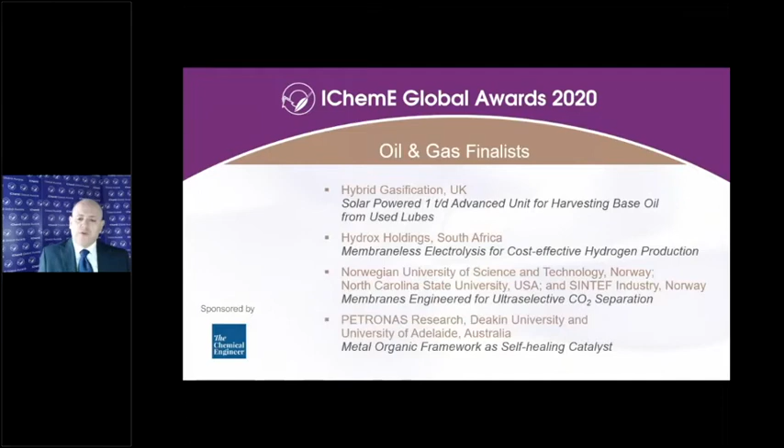Hybrid Gasification, Hydrox Holdings, a joint entry from the Norwegian University of Science and Technology, North Carolina State University and SINTEF Industry. Another joint entry and winner of the IChemE Malaysia Oil and Gas Award, Petronas Research, Deakin University and the University of Adelaide. Saudi Aramco, EXPEC ARC, and 3 more entries, all from Saudi Aramco.

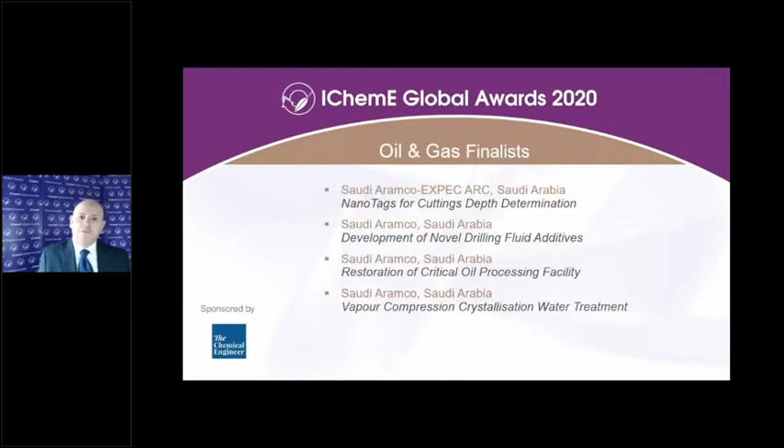Yes, my name is Abdullah Malik and I'm going to present to you my 2020 IChemE Global submission on a solar powered 1 ton per day advanced unit for harvesting base oil from used lubes.

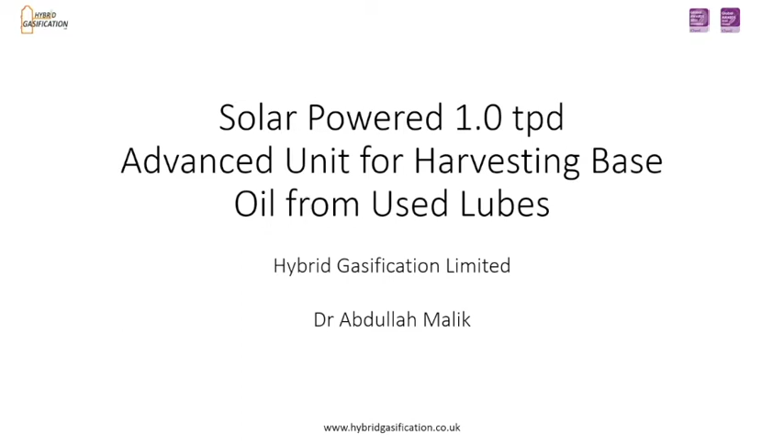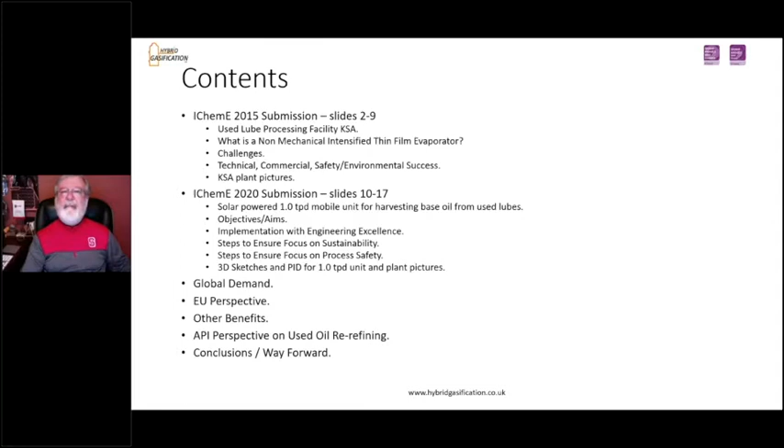My presentation, I'm not too sure how long I can take. Can I be advised on that? How long I can take on the presentation? You have approximately 10 minutes. 10 minutes. Okay, thank you very much.

I wasn't too sure. But my presentation consists of 9 slides, almost 8 slides on my previous submission in 2015, which was shortlisted. I will run through quickly just to put some perspective to where we went to the next stage of this 2020 submission, and I'm happy that it's also been shortlisted for the presentation. And then I will go to some global demand for base oil, lube oil, and EU perspective on that, and in the end some conclusions.

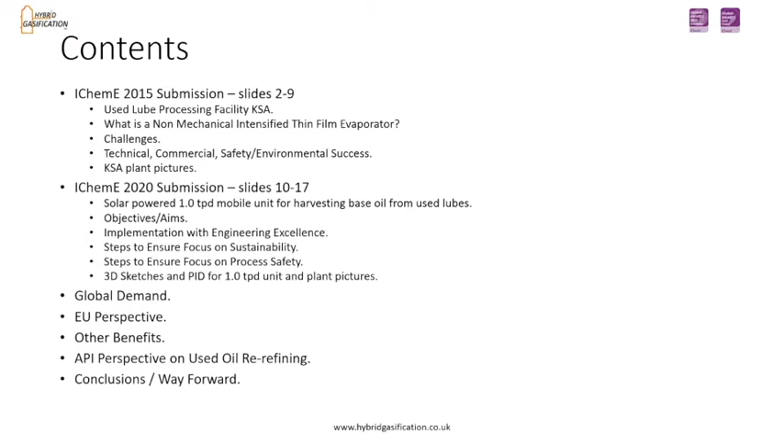The first used lube oil processing facility, 100 ton per day capacity, was built in Saudi Arabia to produce Group 1 heavy base oil. It was a vacuum distillation facility. It used structured packing for separation of consistent quality product. Actually, the interesting and novel part was that rather than using a conventional wiped thin film evaporator to treat the residue, a non-mechanical thin film device was fitted in the flash column, for which a patent has been filed.

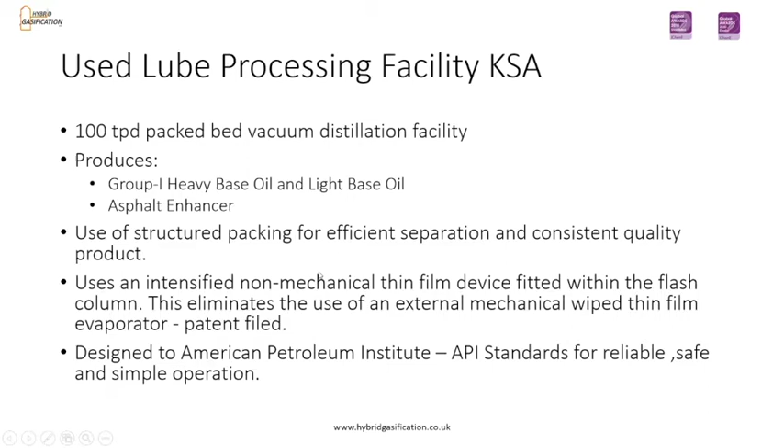I'll explain a little bit on what a non-mechanical intensified thin film evaporator is. It is a device fitted on the bottom of a flash column, which helps to recover the remaining part of the base oil when the heated base oil enters the flash column. And amazingly, we were able to achieve more than 80% recovery without fitting the mechanical wiped thin film evaporator the conventional approach normally does. And we are all familiar, being process engineers working in the oil and gas sector, that the problems with mechanical thin film evaporators are always mechanical seal problems.

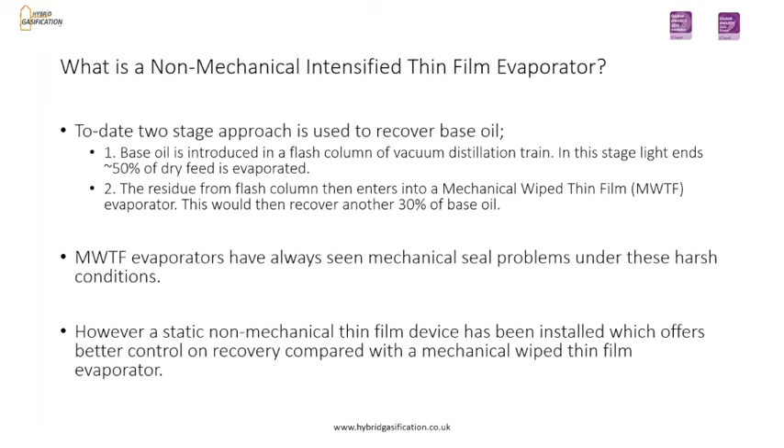The challenge was, when this was proposed by me, that this was a very inexpensive and practical solution, so the client wasn't ready to go for this unproven but very inexpensive practical solution. So we had to do some testing to convince the designer of the plant. We ran a cold testing to establish the optimum flow rate for consistent quality of thin film.

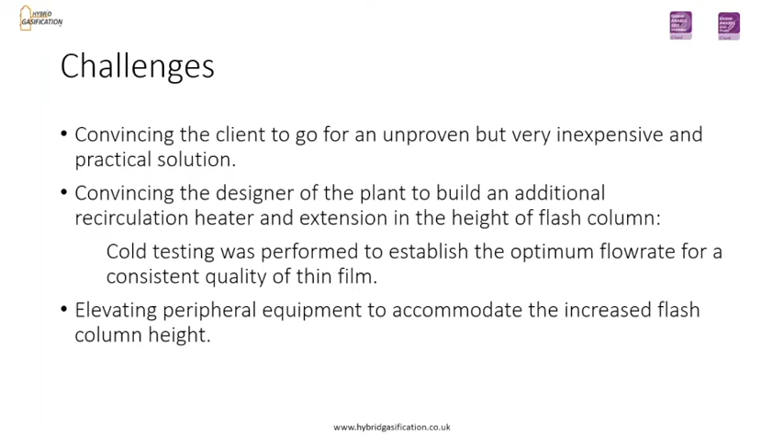For that, obviously, we needed to increase the length of the flash column, and when we did that, we had to elevate the peripheral equipment to accommodate the increased flash column height. So after a few iterative discussions with the client, we got the go ahead. And we installed that, and in fact, it performed very well, better than the thin film evaporator, with no downtime and shutdowns, which are typical of the wiped thin film evaporator.

And we saved on the additional vessel, pipework fitting and all that. We saved on the plant downtime, and therefore we built the plant much cheaper, without this additional system, which includes the wiped thin film evaporator.

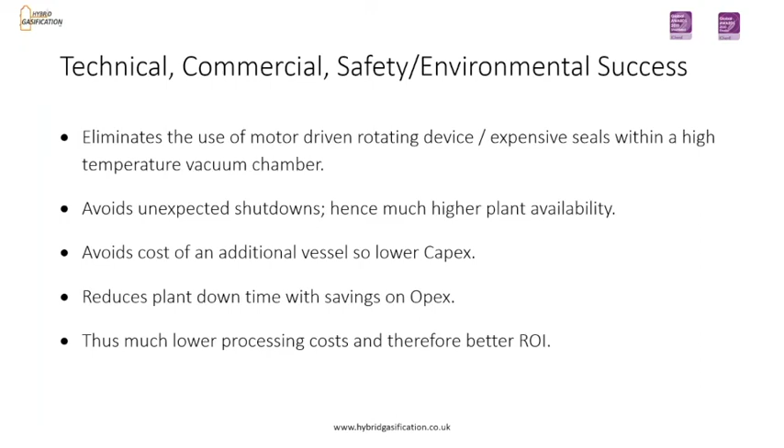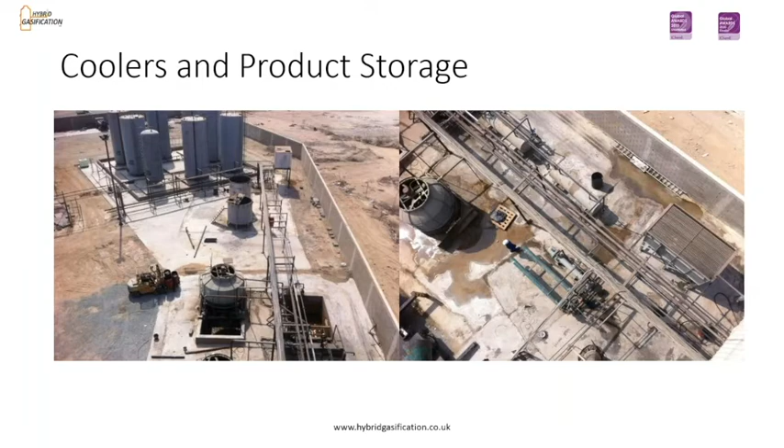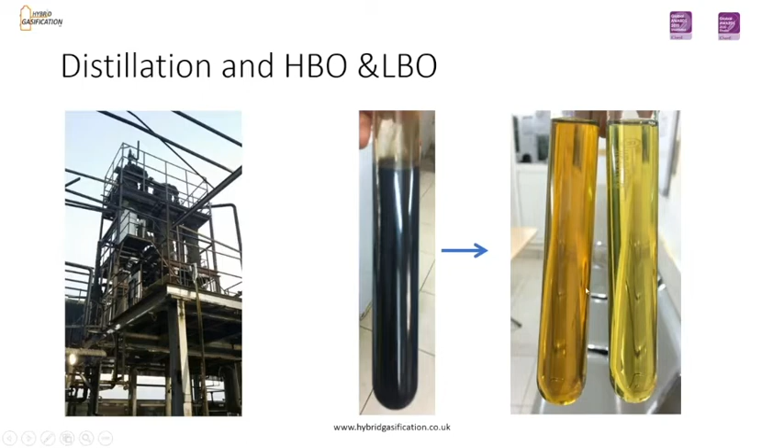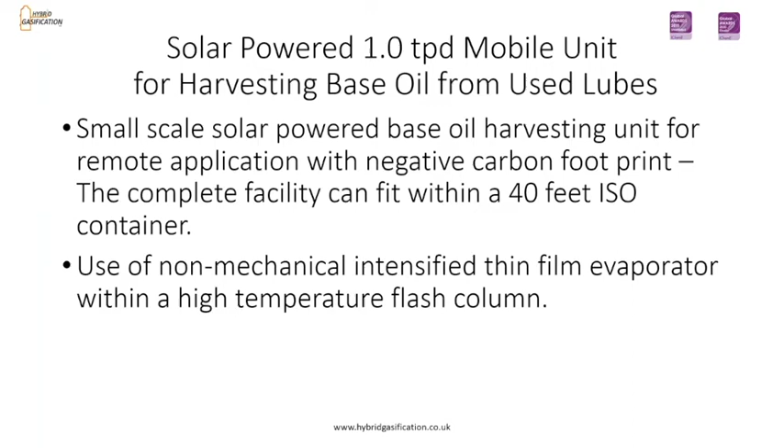Now I come to my current submission, which is a 1 ton per day mobile unit for the recovery of base oil from used lube. The idea was that one could run it with solar powered energy, maybe for 6 to 8 hours, unless you want to run it for 24 hours, depending on the economics where it's installed. So it has also got this non-mechanical intensified thin film evaporator fitted in it.

Some of the objectives here were to improve the recovery and quality of product by avoiding adulteration from random different types of oils when it's taken to the centralized facility, and improved environmental benefit by avoiding the use of fossil derived energy.

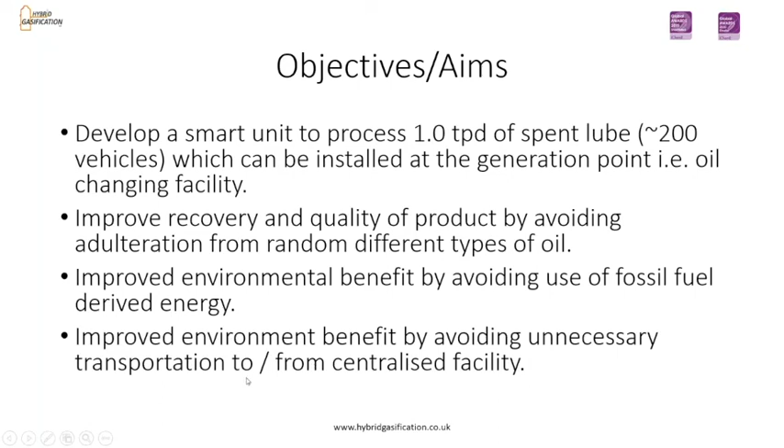And last but not least, the objective was improved environmental benefit by avoiding unnecessary transportation to and from a centralized facility. There were a few challenges in building a small unit. One of the challenges was to downscale a 100 tons per day plant to 1 ton per day. And you can imagine there were a lot of process engineering challenges.

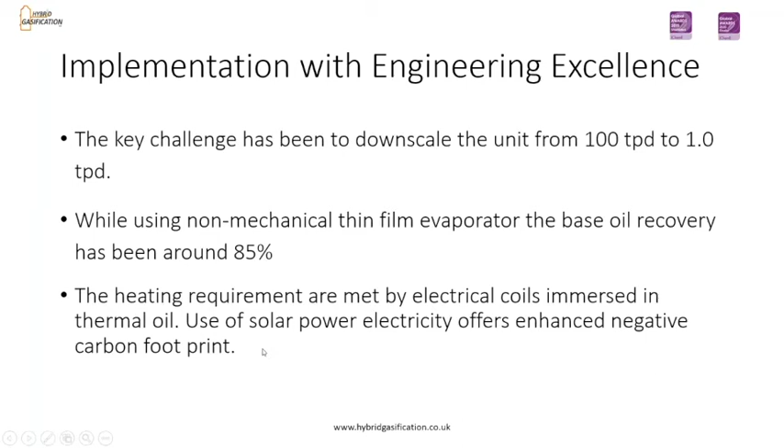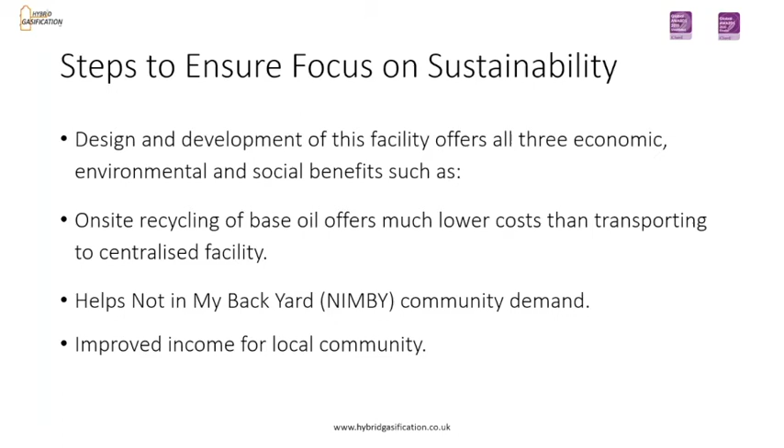The recovery we could achieve was 85%, and the heating requirement was met by an electrical coil immersed in thermal oil. Use of solar power electricity offers an enhanced negative carbon footprint. That also gave the benefit of sustainability: on-site recycling of base oil offers much lower cost than transporting to a centralized facility. It helps with the not in my backyard, NIMBY, community demand, and improves income for the local community.

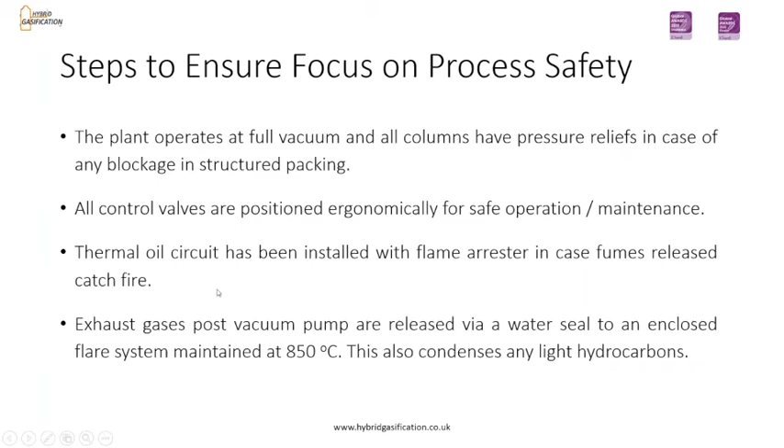Process safety wise, there were a few things we needed to look into. The process plant operates at full vacuum and all columns had pressure relief valves installed. All control valves were positioned ergonomically for safe operation. The thermal oil circuit has been installed with a flame arrestor in case released fumes catch fire. Exhaust gases post vacuum pump are released via a water seal to an enclosed flare system maintained at 850 centigrade.

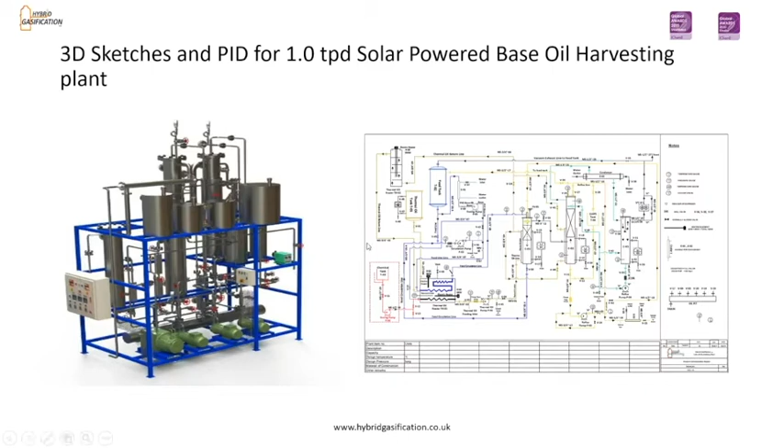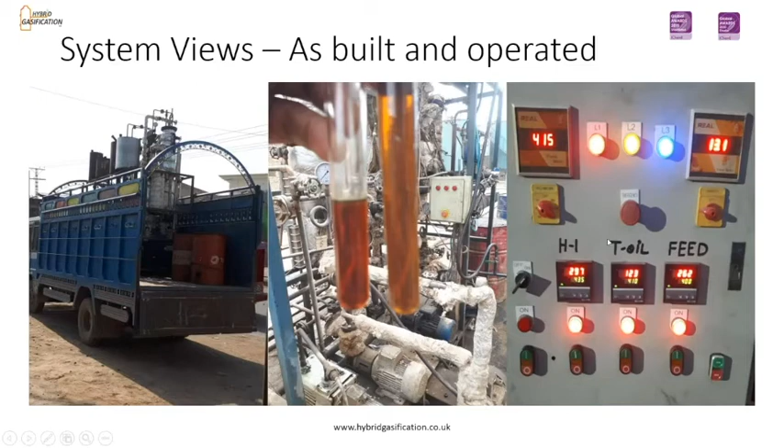In summary, a 1 ton per day compact unit has been installed. It achieved 85% recovery. It brings the benefits of on-site recycling of base oil, resolves the effect we talked about, and the complete processing unit easily fits in the space of a 40-feet container.

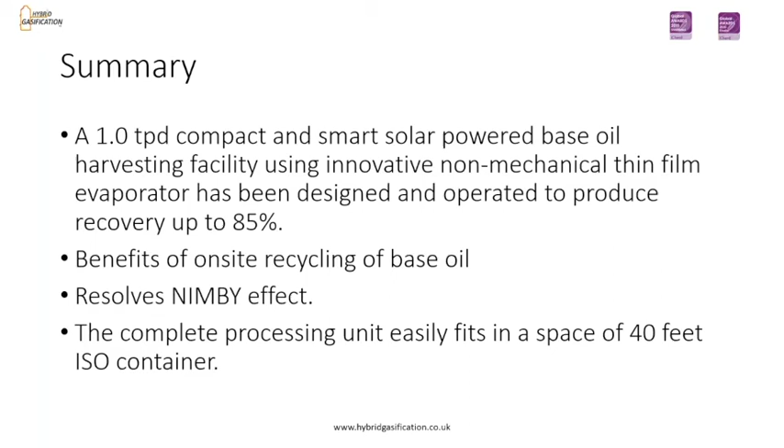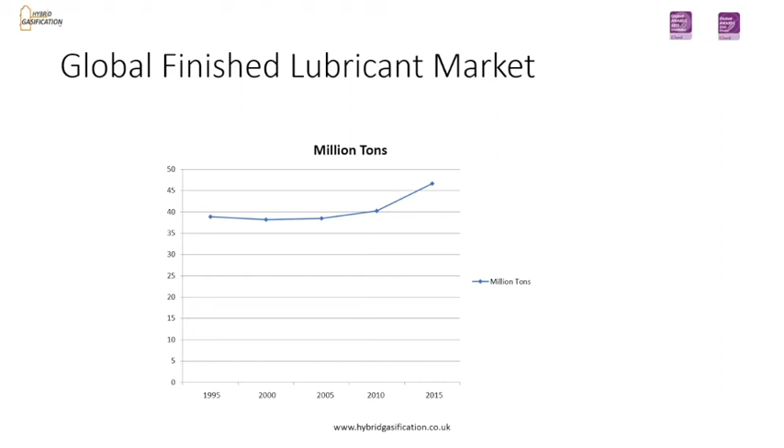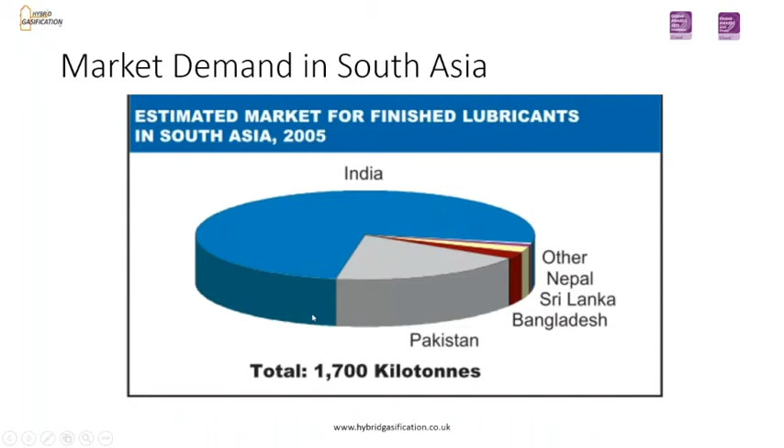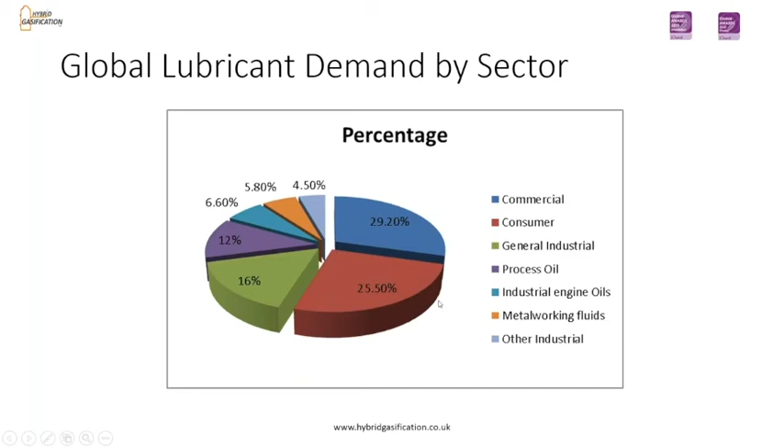For those of you who want some feeling of it, the finished lubricant market is of the order of 40 to 50 million tons per annum globally. In global demand, Europe, America and Asia Pacific all share almost equal percentages. Pakistan and India are almost 1.7 million tons of market. By sector, almost 50% is in the commercial and consumer sector, which can be tapped if this process is taken forward.

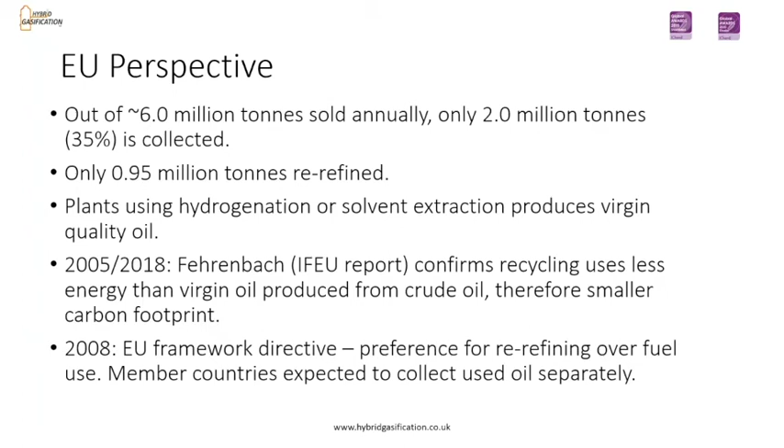There's an EU perspective I've added in my presentation. Out of 6 million tons sold annually, only 2 million tons are collected, and almost 1 million tons are re-refined. Plants using hydrogenation or solvent extraction produce virgin quality oil. A report by Fehrenbach confirms that recycling uses less energy than virgin oil produced from crude. An EU framework directive insists on preference for re-refining over fuel use. So we should really stop using it as a fuel, and used oil should be collected separately.

Benefits to the oil refining sector from this particular technology: re-refining offers an overall negative carbon footprint compared with the crude oil route. It keeps lube oil in productive use and delivers improved oil security. Non-mechanical thin film evaporation can be applied in several other areas of refining.

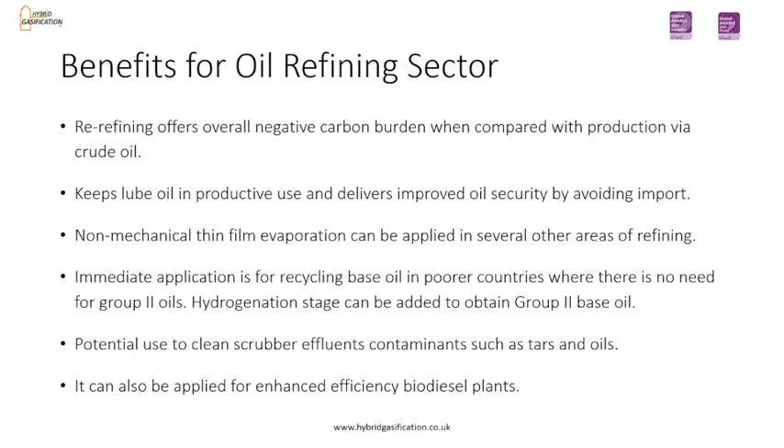The immediate application is for recycling base oil in poorer countries where there is no need for group 2 oils, where the old cars are. But a hydrogenation stage can be added to obtain group 2 base oil. Potential uses include cleaning scrubber effluent contaminants, and ethanol recovery in biodiesel plants. There are several more applications for this thin film evaporator within the petrochemical and refining sectors.